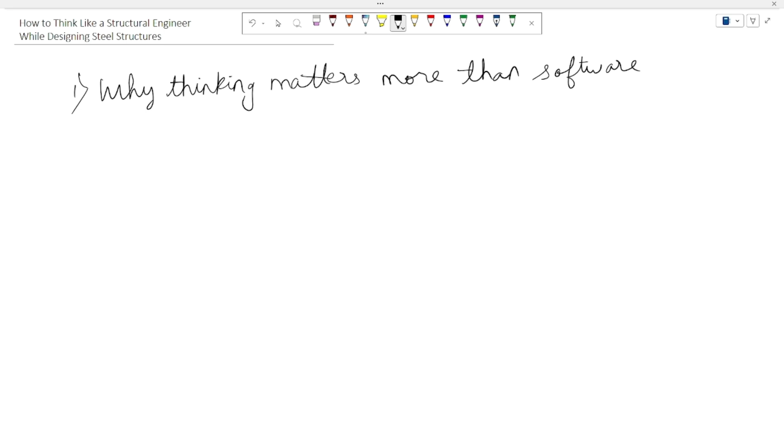Let's assume that you model this structure. You assign certain supports: pin connection, roller connection, fixed connection, whatever. You assign certain loading to your model. Behind these loadings and behind these support conditions, there are many assumptions which are made by the software. Most beginners don't even know what assumptions they are making. Software hides these assumptions behind checkboxes. Whenever you assign any kind of pin support, or loading, or certain specifications to members like member releases, there are assumptions made by the software. And if these assumptions don't match with what's actually constructible on site, there will be errors.

Most design errors are not calculation errors, they are assumption errors. What you assume while modeling should be practical on site. If it is not matching, then there will be an error.

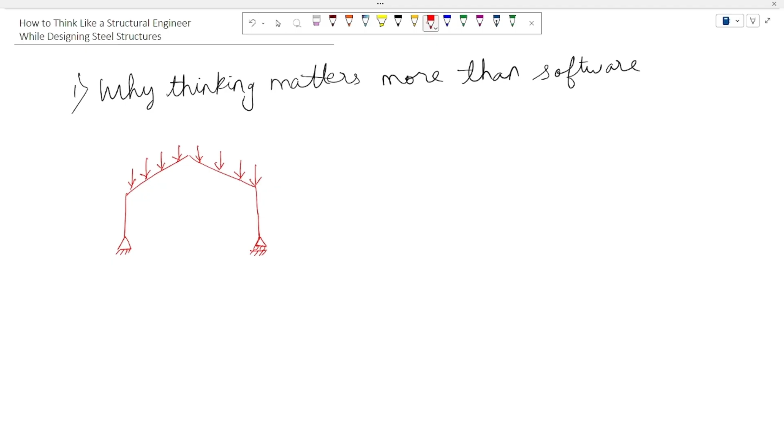Next, software cannot judge structural behavior. Software will only give you forces and utilization. Whenever you model, you get the forces in the member, and if you design these elements in the software, you get the utilization ratio. The software will not be able to tell you if these forces are practical and if your member will actually carry these forces. Is this force realistic? Are the connections buildable? Whatever connections you are trying to make in the software, are they practical on site? These things software will not be able to tell you.

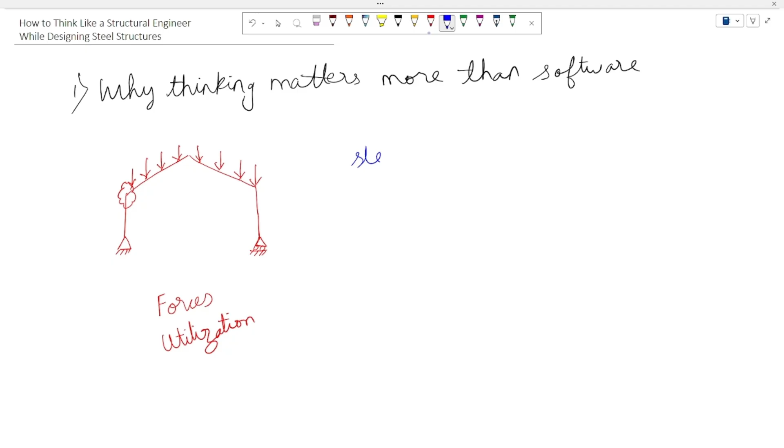Next, there is a major difference between steel and RCC structure. Steel structures are extremely sensitive to wrong thinking. Some of the properties of steel: it is a slender material, it is light in weight, it is highly sensitive to buckling, and stability is also a big concern for steel structures.

Steel structures are long members, they are mostly slender, so all these parameters we discussed affect your structure. When you compare the same thing with an RCC structure, RCC structures are huge, the self weight is large. Most of the errors, most of the thinking issues, are hidden behind this heavy mass of the RCC. Because of the huge self weight, issues like buckling and stability hide behind the heavy mass. So even if there are certain issues with the thinking, still your structure will not fail. Comparing it with steel structures, it will fail because you have not guessed the right thing.

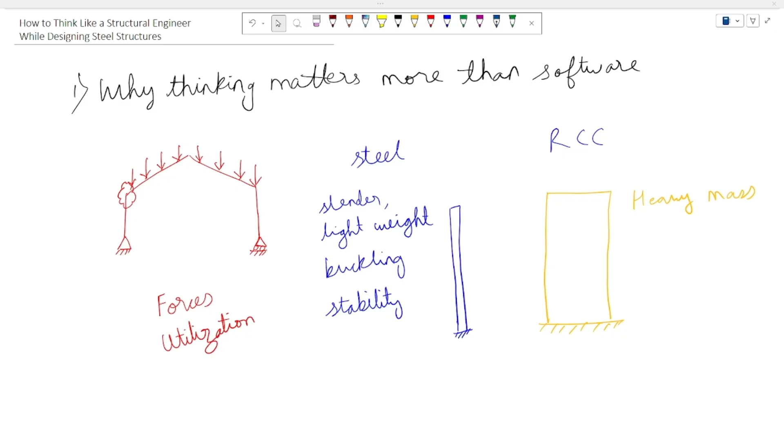The next step: start with the big picture, not the member, system level thinking. A steel structure is a system, not a collection of beams. It's not a beam, or a column, or an individual member. It's a load carrying system.

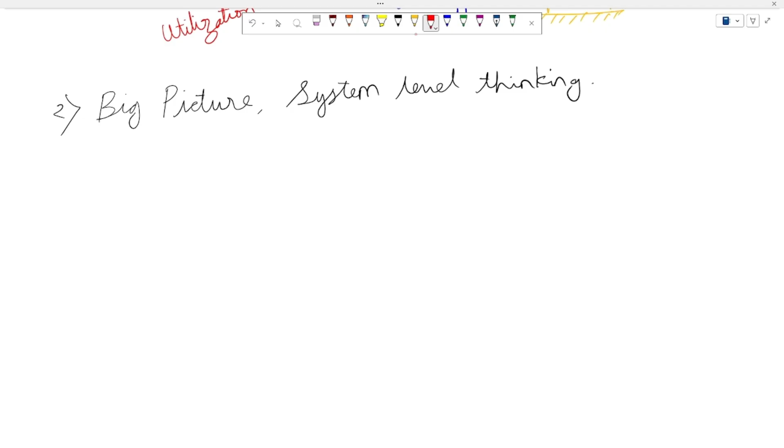First question: why does this structure exist? Let's assume this is a structure you want to model. The first question you should be asking is, what is the purpose of this structure? Is it an industrial structure? Is it a steel warehouse? Is it a power plant? Or is it a pipe rack system? What is the function of this structure? Not just the geometry, understand the overall function.

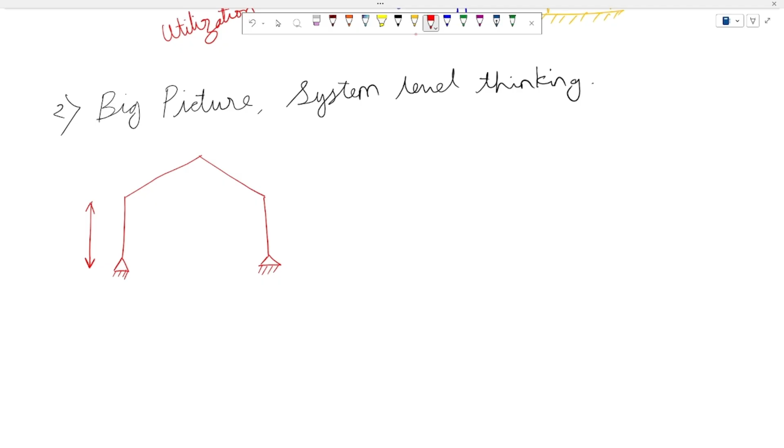What will be the clear height of your structure? What will be the clear span of your structure? What will be the loads which would be coming on your structure? What would be the general openings for your structure? All these questions you should be asking before you start designing it.

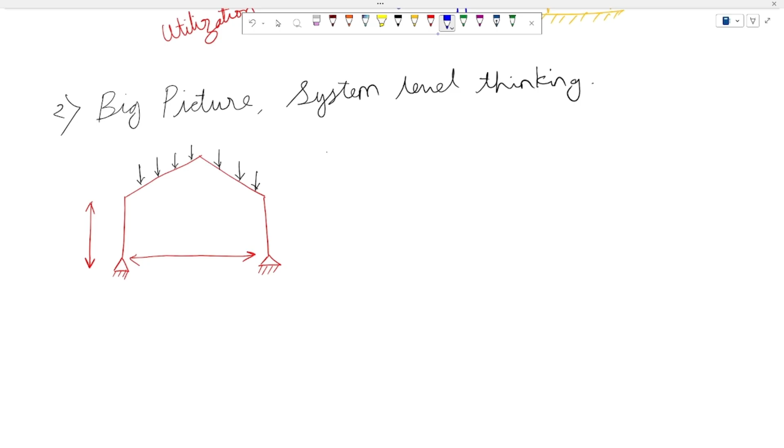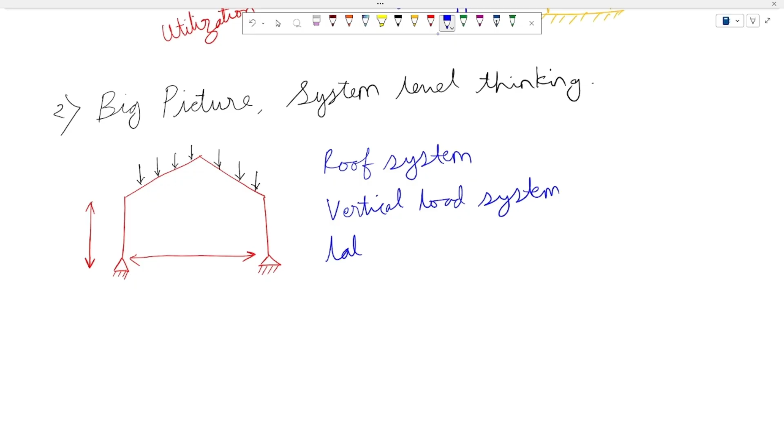Think in terms of zone, not just member. You should mentally break your system, break your structure into various zones. You could have a roof system, vertical load system, lateral load system, foundation interface.

Each load system has certain members assigned to it. When you are building a roof system, you could have some rafters and some purlins over it. This will be part of your roof system. Vertical load system, you will have your rafters and columns which will transfer the force to your ground. Lateral load system, there could be a bracing system which would transfer your load to the ground because of the wind or seismic action.

Or finally, you could have your base plate which will finally transfer your load to the footing. So in this way, you have to break your structure into zones: roof, vertical load, lateral load, foundations.

You should identify the primary load resisting mechanism early. How will the gravity load be resisted? How will the wind load be resisted? Seismic load. How will be the portal action in your structure? What would be the bracings you would be providing? Will you be providing a moment frame? If you don't choose your system properly, the software analysis will automatically choose one, and the randomly chosen system by the software may not be what you have assumed.

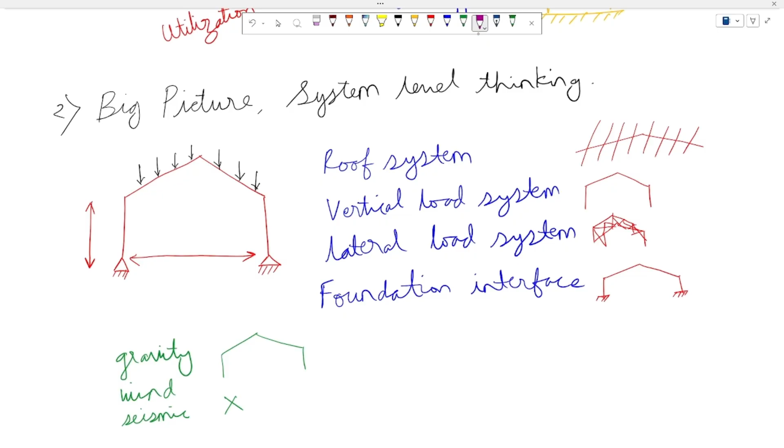Next, clear span controls everything in steel. The span of your frame, the span of your structure will control most of the things in your structure. The span is very important. Also, the spacing between the frames is important.

Let's assume you are having multiple frames. The spacing between these frames is equally important. The portal frame span and spacing defines the individual member which you are assigning to it, whether it is a column or a rafter. Depending on the span and spacing, the size of your column and rafter will change, and this will drastically increase or decrease the overall tonnage of your steel requirement.

Next, don't just design for today. Think about the life of your structure. Steel structures are modified multiple times during its life. Your thinking must allow this. Think big. Think regarding the future expansion, the future equipment load what could come on it, the additional loads, the maintenance access to your structure.

See, when you are designing, whether the thing you are considering is practically possible on site. Is it constructible? Assembling of your structure, dismantling of your structure, all these things you should think.

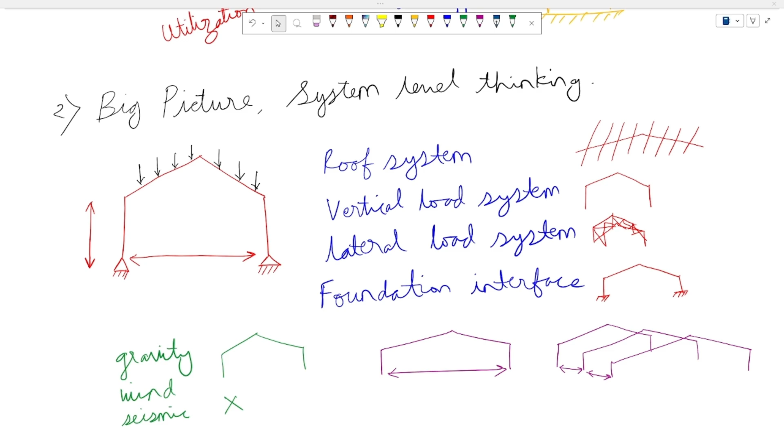Once the system is clear, the next step is to understand how load actually moves through your system. Next, visualizing load flow. Load flow is the language of the structure. How load travels through the structure. Loads don't disappear. They move member by member until they reach the ground. Every load you apply is asking one question: how do I reach the ground?

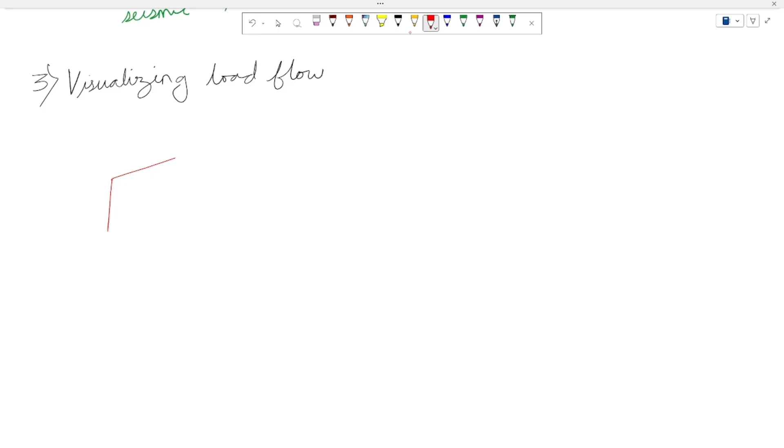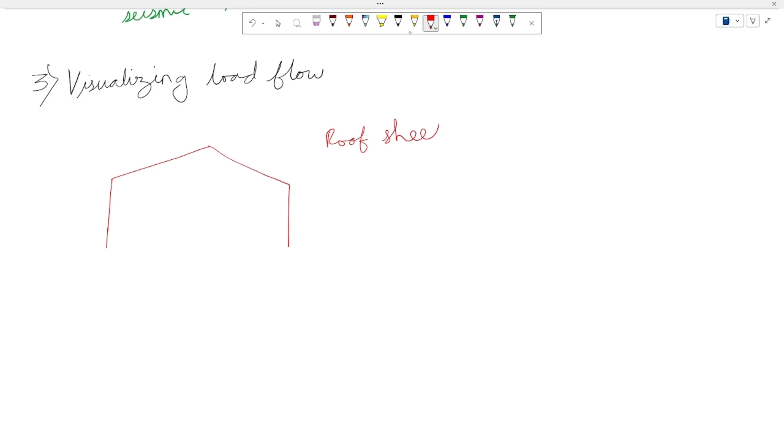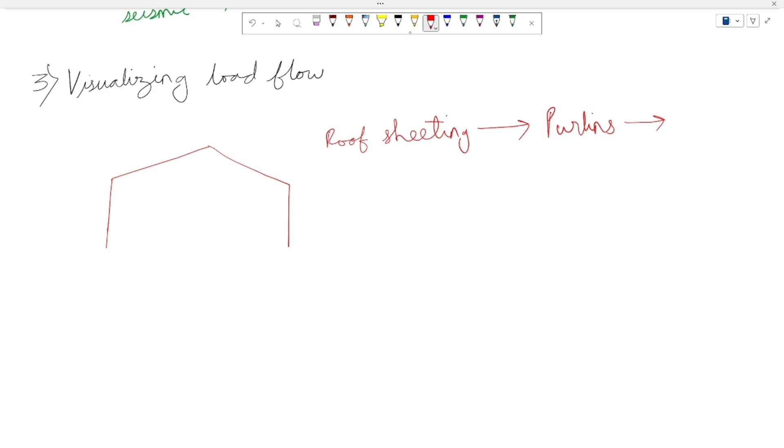Think in clear load path. Let's assume this is the structure. Now whatever load you will be applying on this, it will follow a certain load path from roof sheeting to purlins to rafters to columns and finally to base plate and foundation.

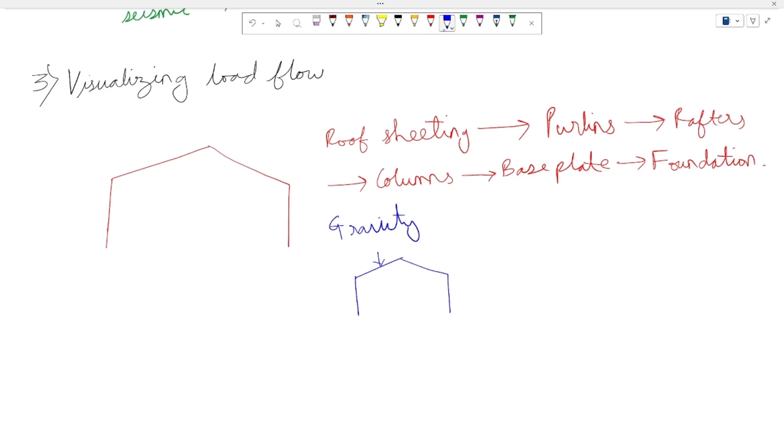Separate gravity load flow from lateral load flow. In a structure, the gravity loads are generally the dead load of your structure and the live load what you would be applying on the structure. These loads are very simple. They act in the direction of gravity and your vertical systems are capable of carrying those loads.

The next important kind of load flow is the lateral loads. These are the loads which come from wind action, seismic action or temperature effect. You need proper load path for these loads to travel to the ground. Generally, they travel through bracings.

Many of the systems are very good in gravity loads but are very bad in lateral loads. Most of the failures which occur are because of poor lateral load path. Many of the structures are strong vertically, but they are weak sidewards.

Load does not only follow the connection of your member, it also follows the stiffness of the member. Two members which are connected will not transfer the same load to another member. The load follows the stiffness of the member. Stiffer the member, higher will be the load transferred to that member.

Flexible the member, lesser will be the force attracted by that member. So the load transferred from one member to another not only depends on the connection of the member, but it also depends on the stiffness of the particular member. Thicker member, heavier member will carry more force than a lighter member.

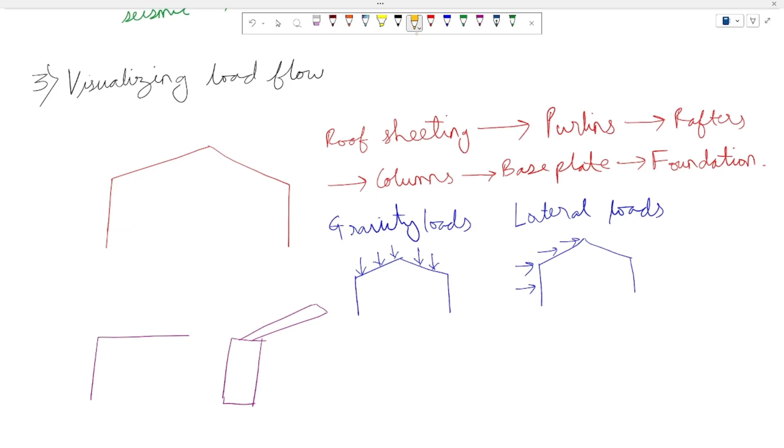Identify compression and tension early. You should understand whether your member is carrying a compression force or a tension force. Let's assume this is the member and these are the cross bracings. Whenever there is any kind of lateral load coming, this particular member will be under compression and this particular member will be under tension.

The difference between compression member and tension member: compression members can buckle easily. Buckling is critical in compression members.

Tension members are important because the connection is critical in these cases. The members which are under tension, for them, connections become critical.

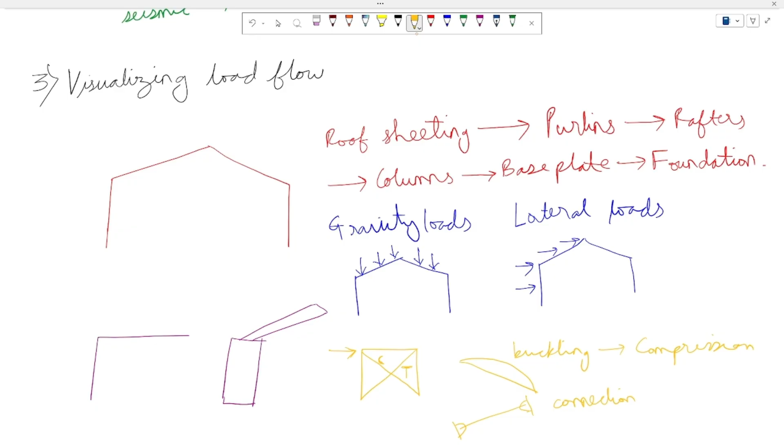There is also reversal of load. This cannot be ignored. A particular structure may have various loads coming on it. Because of force in one direction, a particular member could be under compression and the other member could be under tension. But because of reversal of loads, the same structure will have members under tension in one case and members under compression in other case. So these load reversals cannot be ignored.

So these are all the points which you should keep under consideration when you are visualizing your load flow. After you understand the load flow properly, the next step is choosing the correct structural system. The next step is choosing the right system.

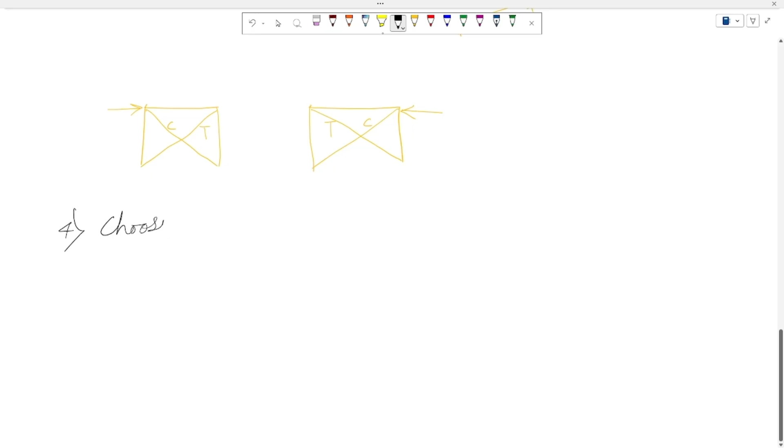There is no best system, only a suitable system. You do not have a universal best system. Every system is a response to its constraint. Right system depends on the type of structure. The type of system depends on the span of your structure, the height of your structure, the purpose of your structure, the load your structure would be carrying, the cost constraint what your structure would be having, the construction methods what you would be adopting, the soil condition of your structure. All these things together will define the correct system for your structure.

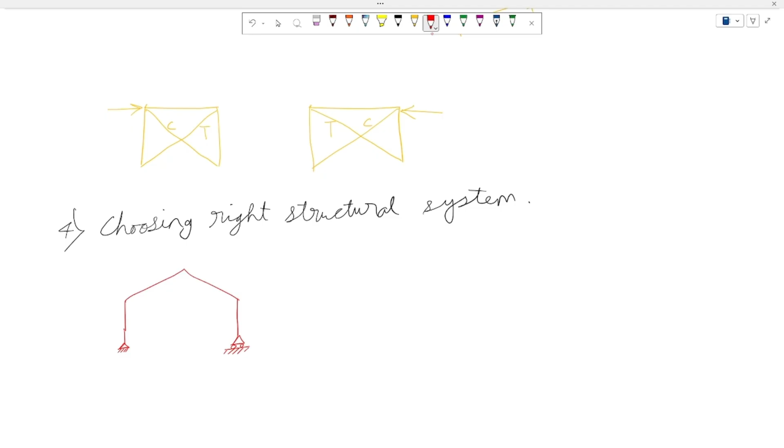First, you should decide how your structure will resist lateral loads. Will you design bracings to carry your lateral loads, or will you design a portal frame to carry your lateral loads, or you will be defining a moment frame to carry your lateral loads? Once you decide how your lateral load will be transferred, half of your work would be done.

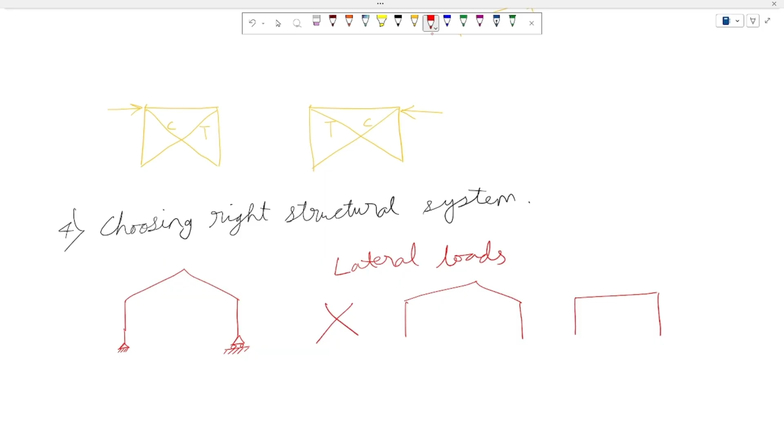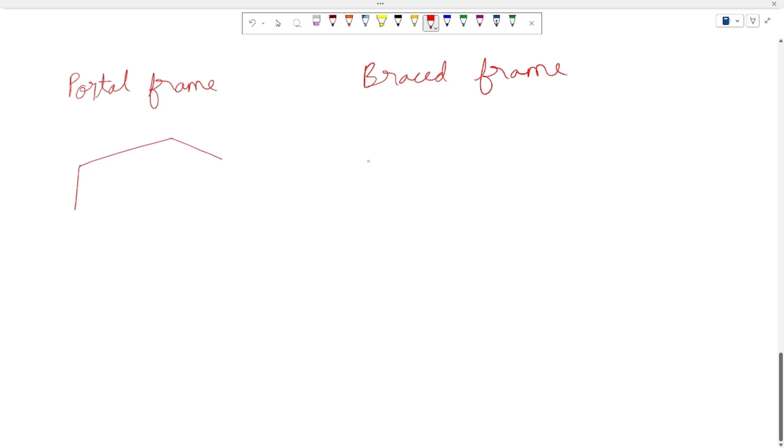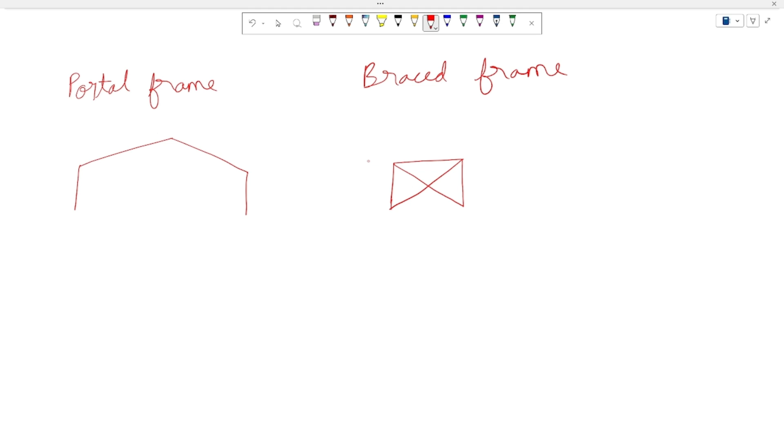Now let's understand the difference between a portal frame and a braced frame. In portal frame, generally you have a frame which will carry moment, and this structure is having fewer members. The sections are heavier and they will be able to carry large moment. Comparing it to a braced frame, it is a structure which will have large number of members. The number of members will be more. These members will be lighter in weight. Braced frame, axial force is critical. Portal frame, moment is critical.

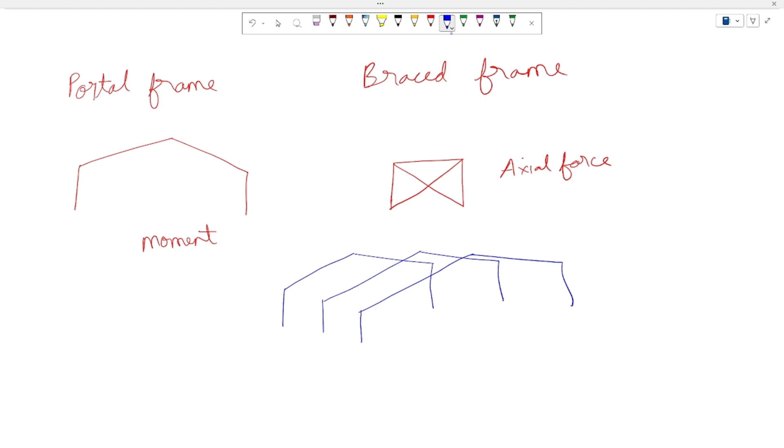A same structure could be a portal frame in one direction and a braced frame in another direction. Let's take an example of a general structure. This is a number of frames, portal frames, and these portal frames are connected by bracings in the other direction. So when forces are coming from one direction, the portal frame will be able to carry them, but when the forces are coming from the other direction, in this direction portal frame will not be effective and braced frame will come into action. So a same structure will act as a portal frame when wind is acting in one direction and act as a braced frame when wind is acting in another direction.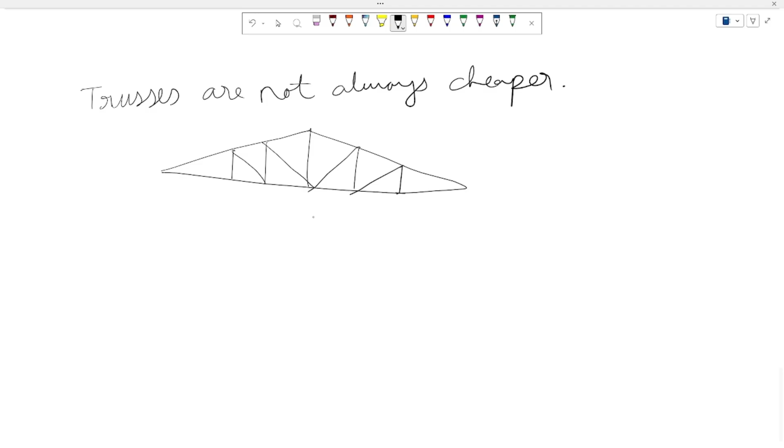Next, stiffness versus weight. Lighter sections are more flexible. More flexible members are subjected to higher deflections, higher vibrations, and P delta effect will be more.

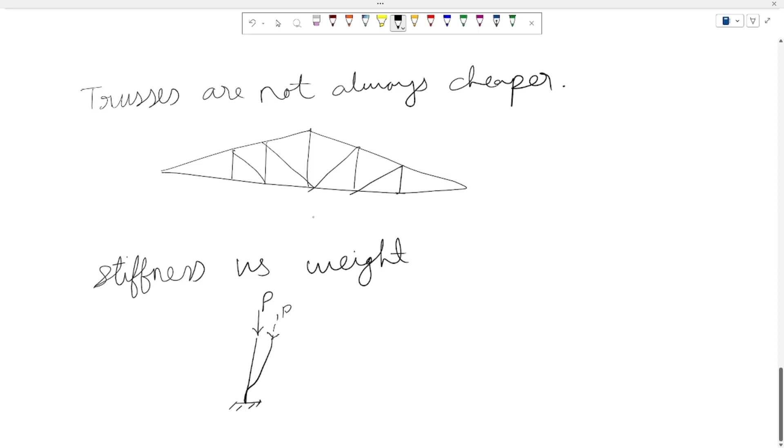Now let's quickly understand P delta effect. If this is a column, this column is subjected to some force P. Because this is a lighter member, this column will tend to buckle, tend to bend, and this will be the final bending. And the force will still be acting at this point P. Because of this buckling, there will be this movement, there will be this deflection delta. Because of this P and delta, there will be one additional moment which will be generated. This additional moment which is generated, it is called the P delta effect.

Lighter sections are more subjected to P delta effect. That is why it is not always economical to have very lighter sections. Sometimes stiffer members give economical solutions as well. Sometimes slightly heavier sections perform better than lighter sections. Steel is often governed by stiffness, not always strength.

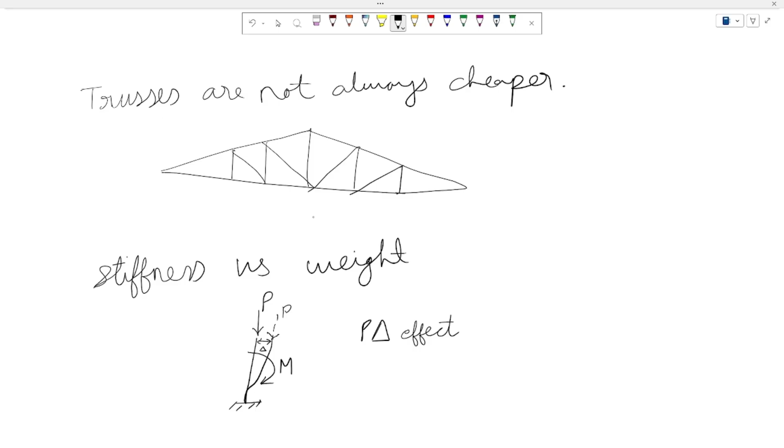Let's discuss regarding redundancy versus efficiency.

A highly optimized system will be less redundant. Optimum system.

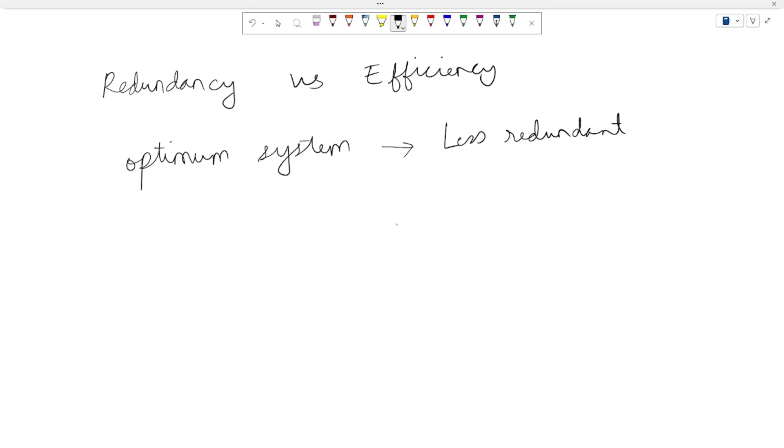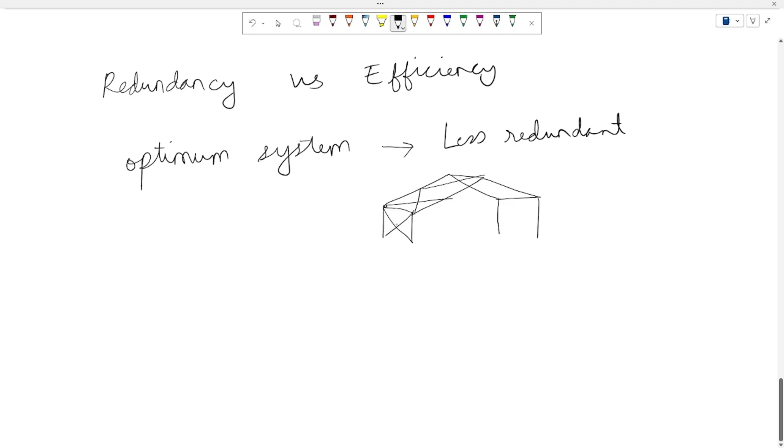A highly optimum system will be less redundant. This means this structure will have fewer members subjected to zero forces or lower forces. In this case, all members of the structure become important. Even if one member fails, or is subjected to some adverse or unaccounted loading, and if there is any failure on these members, the whole system could collapse. This could lead to failure of the structure.

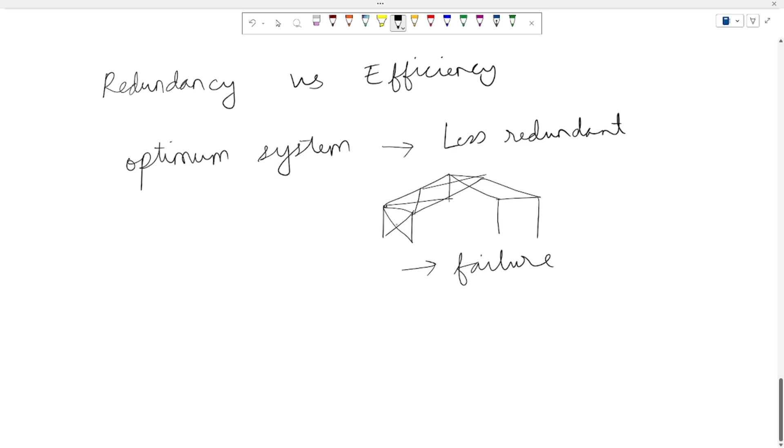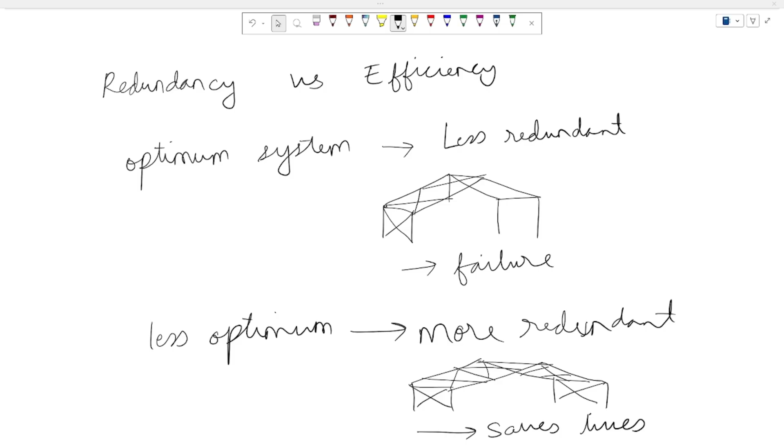Engineering is a sequence, not a collection of checks. Structural design is step-by-step logic. If early steps are wrong, later steps can never be right. Member design is not the starting point. Most engineers mistake this and always start directly with member design. The correct order of steel design thinking is as follows.

First, understand the purpose and constraints. Then choose the correct structural system. Then visualize the load flow applicable in your structure. Then decide the load resisting mechanism. Then go for member design.

Most mistakes in steel design happen because engineers start at the last step, directly jumping into member design. Designing a member in isolation is dangerous. A beam is not just a beam. A column is not just a column. Every member interacts with others.

A perfect beam in a bad system is still a bad design. Whenever you are designing a beam or column, you should always consider the members connected with it.

Connection behavior changes member behavior. Without deciding connection philosophy, member design is meaningless. In steel, you don't design a member, you design a member-connection system. So whenever you design any member, it is not just the member in isolation, it is the member and the connection between that member and other members. So you always have to think about how the connection will be designed, instead of designing the member in isolation.

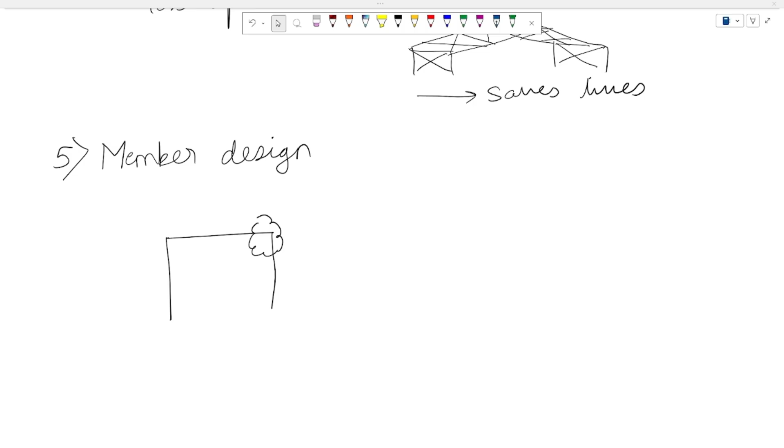Finally, after designing the member, the next step is connection design. Steel structures fail at connections, not at members. Most failures in steel occur because of connections, not members. Generally, when you design a system, the members are usually designed at lower utilization compared to connections.

It is easier to over-design a member but difficult to over-design a connection. So generally, the utilization of connections is more than the utilization of members. Hence, if failure has to occur, it mostly occurs at the connection level, not at the member level. The next important point in connection is assumed behavior versus actual behavior.

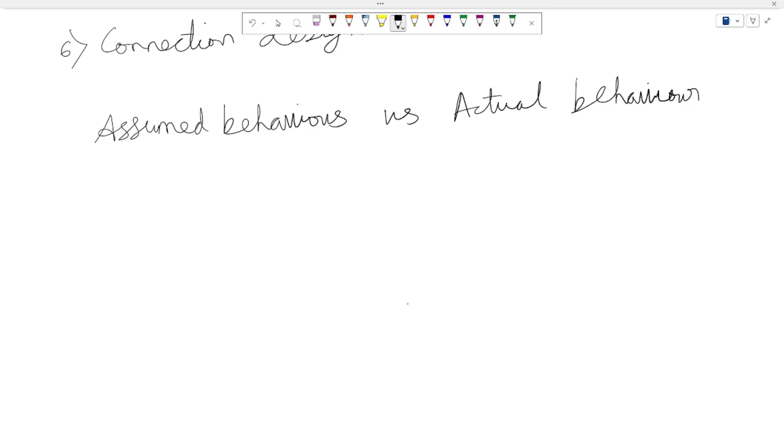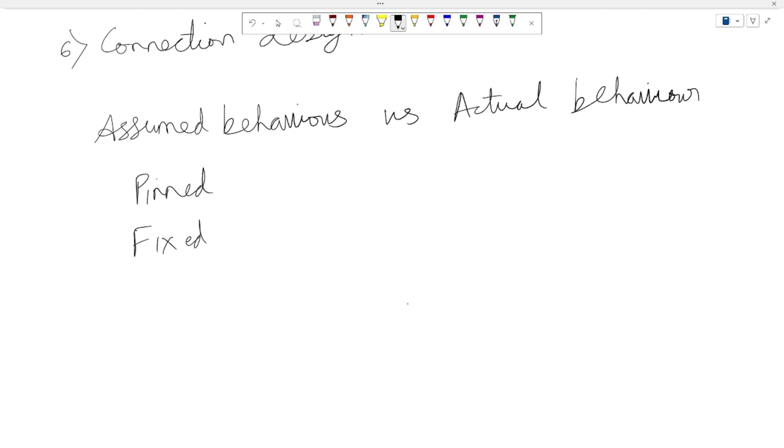In software, engineers often assume pinned connection, fixed connection, but in reality there is nothing as a pinned or a fixed connection. It is either hinged or rigid.

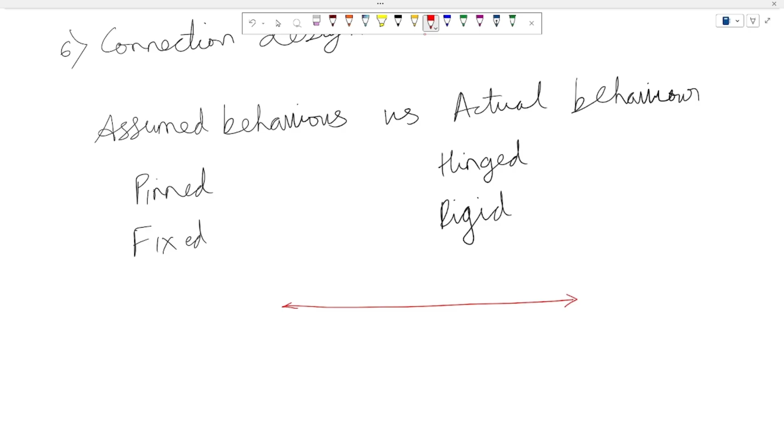Let's understand the difference between pinned, hinged, rigid, and fixed. If this is the stiffness of the connection, theoretically we can define a pinned connection, where you will have zero moment in the connection, and you can define a fixed connection which will have resistance of infinite moment.

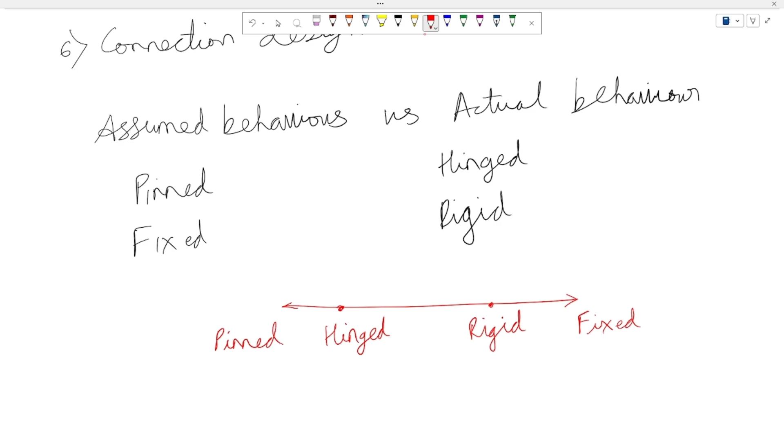But in reality, you do not have a pinned connection or a fixed connection. In practice, you either have a hinged connection or a rigid connection. Hinged connection is very close to theoretical pinned connection, and a rigid connection is very close to theoretical fixed connection. So these things you have to keep in mind.

In theory, when you are assigning a pin connection, in practice you have to take care that at least you give a hinged connection. And in theory, if you are assigning a fixed support, you have to take care that at least you have a rigid connection in practice.

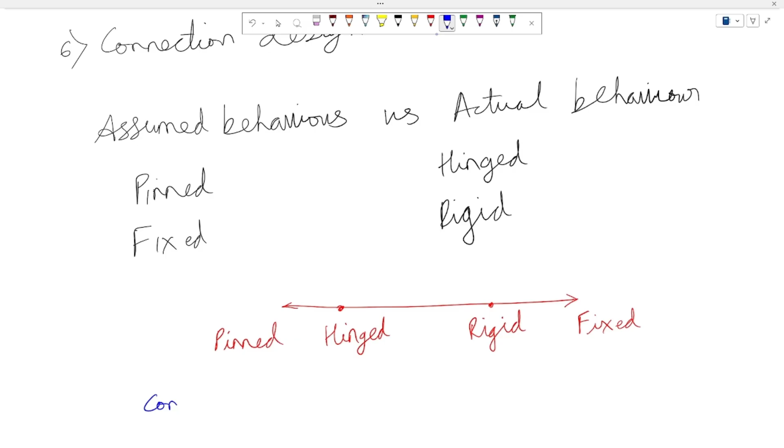Next important thing: connection detailing is engineering, not drafting. Many engineers misunderstand this and treat connection as drafting and not engineering. Connection detailing equals engineering, not drafting. Many people treat detailing as drafting work and don't consider it engineering work. Bad detailing can destroy a good connection as well.

After having a good member design and a good connection design, the next thing you need to take into consideration is stability issue. Let's discuss stability. Stability, not strength, governs steel design.

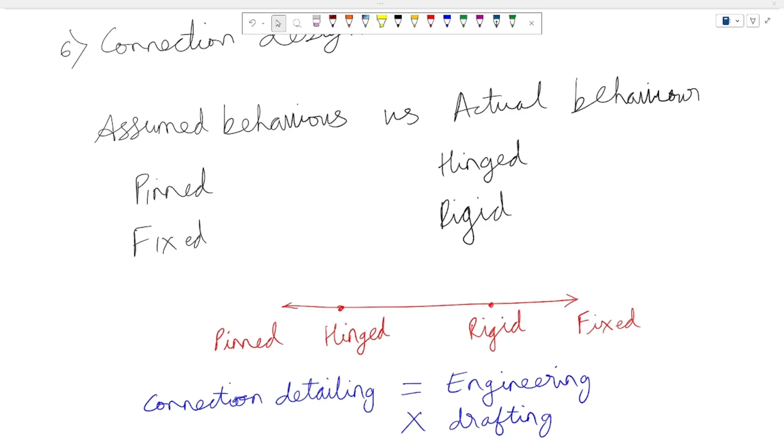Most steel members don't fail by yielding. Steel has the highest yield strength, but steel members are slender, flexible. They usually fail due to buckling, instability, excessive deformations. In steel structures, members rarely die of old age. They collapse due to instability.

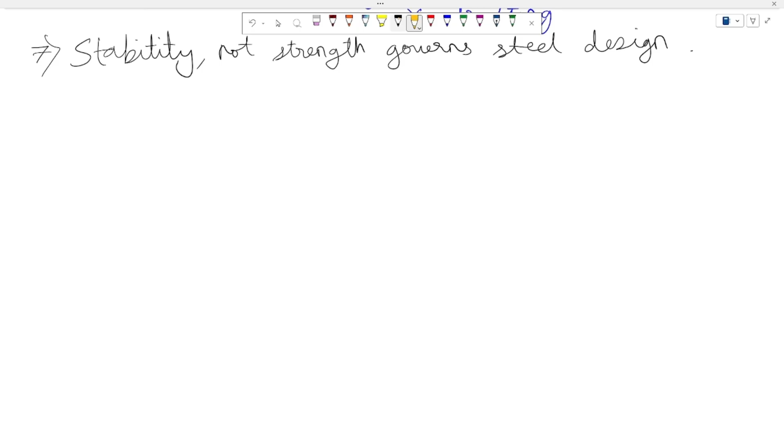Now let's discuss global stability versus local stability. In local stability, we have member buckling, plate buckling, column flexural buckling, beam lateral torsional buckling. So all these checks have to be considered.

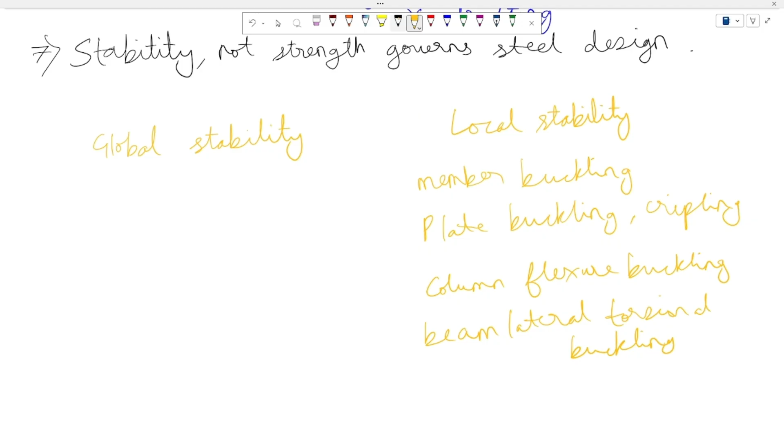Now what controls these local stabilities? To check these local stabilities, we check slenderness ratios. We have section classification, cross-section classification. Then we have unbraced length. All these factors can be considered to check your local stability.

Now let's talk about global stability. In global stability, we have sway of your member, overall sway of your member, frame instability, and most important, you have the P-delta effect, which is also called the second order effect.

How to control this global stability? This can only be controlled by a proper structural system, proper bracings, and proper load path continuity. So global stability and local stability both have to be considered in steel.

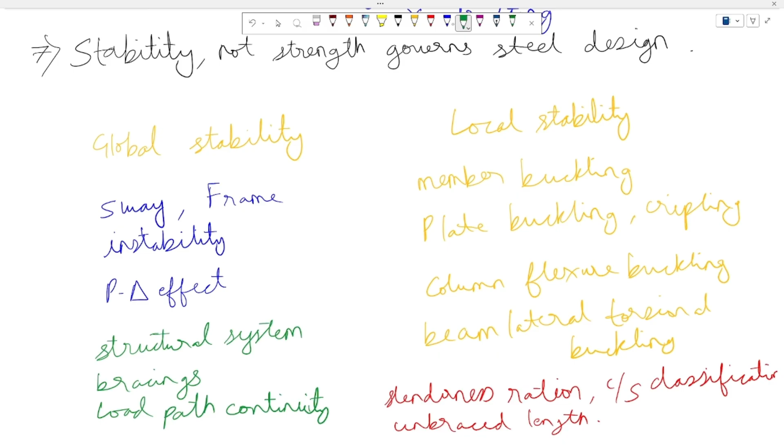Now let's discuss some typical stability mistakes which young engineers generally do. They assume pinned or fixed connection without checking whether these are actually practical on site. Sometimes you just model a structure and assign fixed supports, but you also have to consider whether these kinds of fixed supports are actually possible on site. Is it possible to give a rigid connection for these kinds of supports?

Trusting the default settings of the software, designing only for strength and not checking deflections, not checking the serviceability criteria—all these lead to failure in stability. If you consider all these factors, you can design a stable system. So these are the 7 points on which you should think before you start the design.

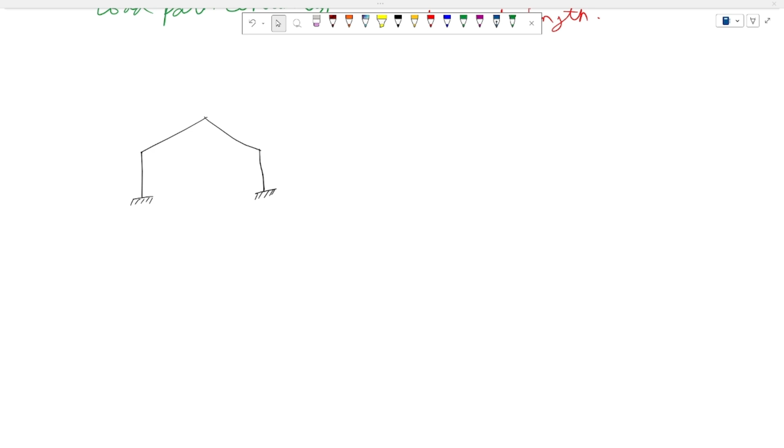Let's have a look at the mental checklist of a structural engineer. You should be able to answer all these questions before you begin the design. Do you understand the purpose of the structure? Is the structural system clear to you? Can you draw the load path of your structure?

Do you know how each and every member behaves in your structure? Are the connections clear to you? Is your structure stable? Can this structure be easily constructed on site? Are the results of the software matching with your expectations? If you know the answer to all these questions, then you are following the correct path.

Today's video was about thinking like an engineer, not operating software. In the next videos, we'll take every concept you saw here and go deep, step by step, with real examples. If you want to be the engineer who understands why a structure works, not just whether it passes, this channel is for you.